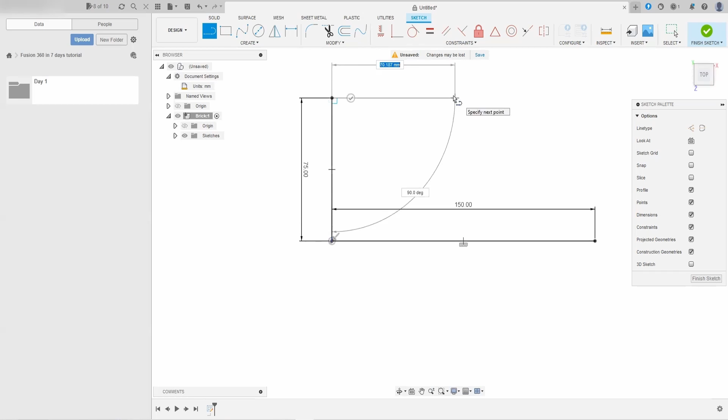This is day 4 of learning Fusion 360 in 7 days. This tutorial series is for complete beginners with Fusion 360 in order to learn the ropes from sketching our first component to assembling geometries by day 7.

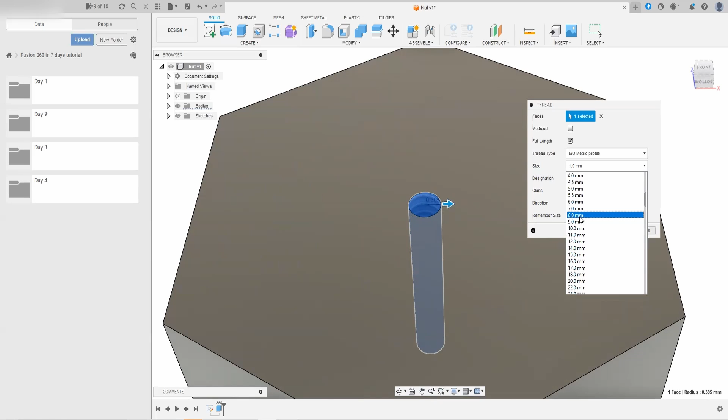Today, we will be taking a look at how we can use the thread command in order to model standard sizes of bolts and nuts, as well as seeing how construction planes may be helpful in order to mirror certain desired features we create along the way.

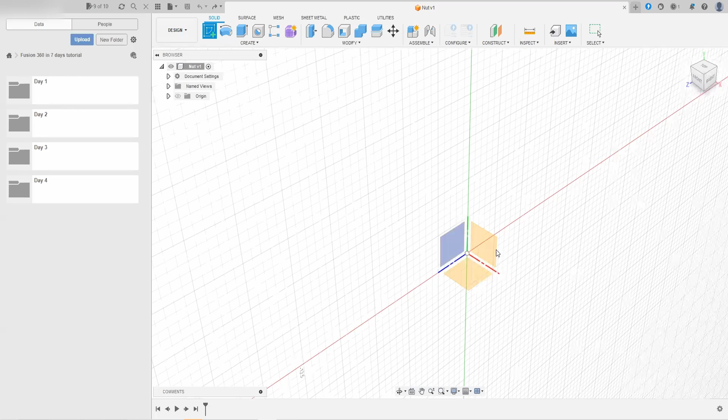Let's get into it. In order to start sketching our nut, we need to first sketch the nut's hexagonal shape. Luckily for us, there is a polygon sketching aid built into Fusion. But first, let's enter sketching mode. Now we can go to the Create drop-down section and find the Polygon section.

A circumscribed polygon is where a circle can be drawn inside a polygon so that all of its faces or edges are tangent with the circle. And an inscribed polygon is where we can draw a circle that passes through all of the vertices of a polygon. Or edge polygon, which simply means dimensioning one edge of the polygon, and the program will sketch the rest around it.

For this example, I'm going to go ahead and choose the circumscribed polygon, and as we can see, this window will appear here. And like the circle command, we will put the origin of the polygon at the global center of our environment and drag outwards. As we can see, two dimensioning boxes appear. One for the number of edges we want our polygon to have, and the other for the radius of the circumscribed circle in the polygon.

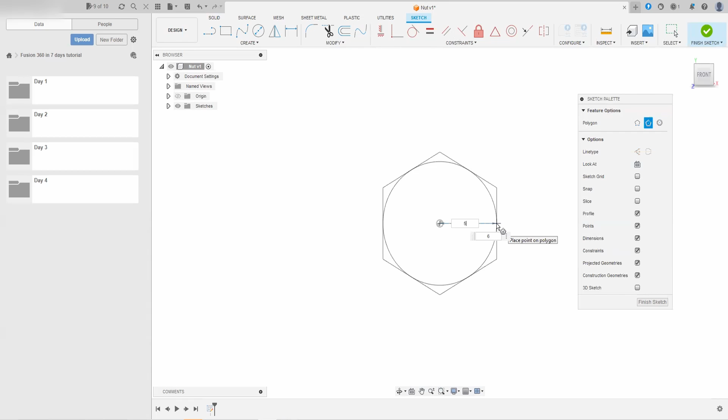Since we are modeling a nut, I will choose the number of faces as 6 to have a hexagon, and for the radius of the circumscribed circle, I will put 5.5 millimeters. Click again, and there you have it. That's how easy it is to sketch a polygon.

Next, we'll draw a circle inside the hexagon, which when we extrude will represent the hole that is present. So grab the circle command and snap it to the middle of the environment and drag outwards. And I will dimension the circle to have a diameter of 8 millimeters. Click on OK, and there is our circle.

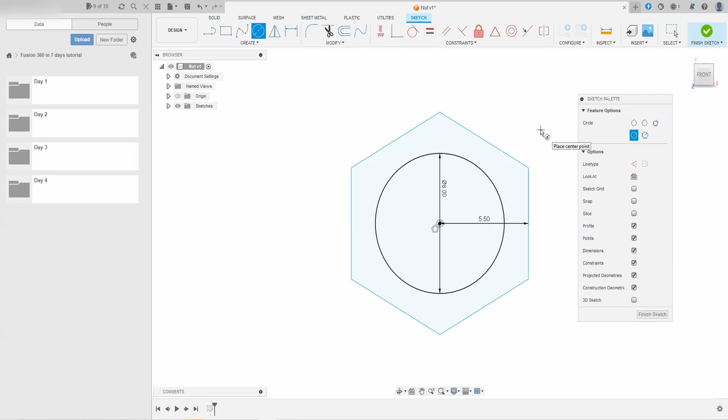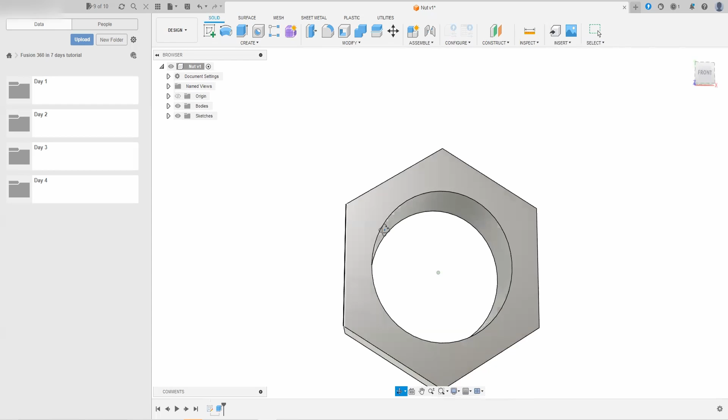Now we can use the extrude command to only extrude the area between the circle and the hexagon. So exit sketch mode and grab the extrude command and select the outer area. And let's extrude this by 5 millimeters. Press on OK. And there you have it. We have the basic shape of our nut.

As you may have noticed, I took a bit of a shortcut, having sketched the area where our hole was going to be before I extruded the shape. You could have also just extruded the regular hexagonal shape and then gone back and in a separate sketch drawn the circle and cut it from the center to the bottom. Either way, this would have worked.

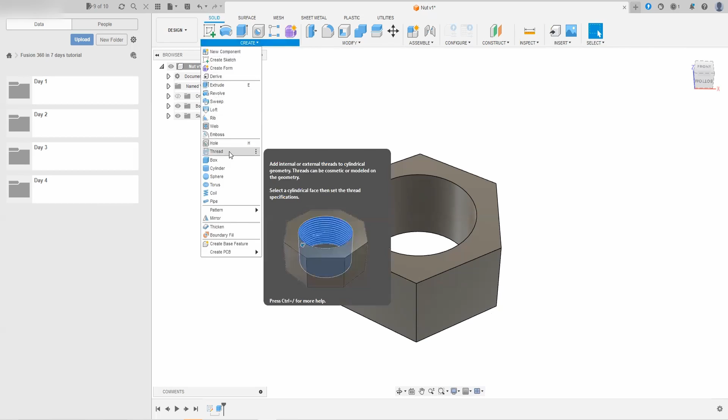Now let's add the threads to our hole. To do this, we can find the thread command, which is in the Create drop-down menu, and that will open up this window here. First, we need to specify which face we want our threads to be on. In this case, it will be the inner face of our hole.

The modeled checkbox just underneath gives us the option whether we want the thread to be physically modeled or just give a visual representation of what the threads are going to look like. This checkbox below, the one named full length, gives us the option on whether we want to extend the threads across the entire length of the selected face, or if we unselect the box, we can choose to specify the length over which we want the hole to be threaded.

For thread type, this allows us to choose the thread standard we want. We will leave it as ISO Metric profile for this example.

Size allows us to specify the diameter of the thread. Please note that the diameter of the thread does not need to match the diameter of the hole that we've created. The hole that we created was just simply a placeholder to specify that we want threads in this area. So if we wanted, we could choose a thread diameter of size 1 millimeter, for example, and this would actually fill in the hole that we initially created. But for now, let's leave it to a diameter of 8 millimeters.

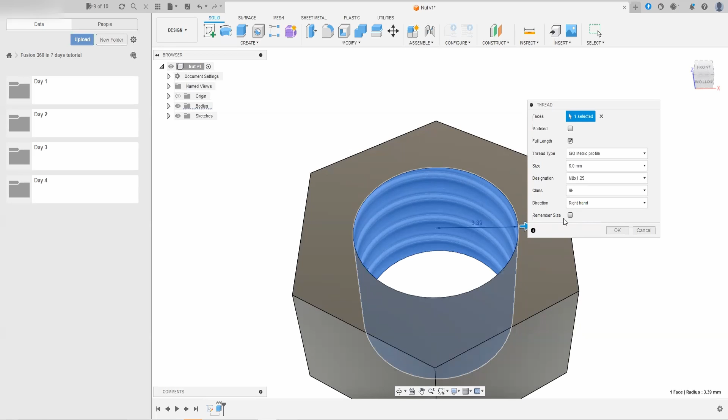Now that we've gone through all the options and that we have chosen the threads that we want for our hole, we can go ahead and press on OK. And there you have it. Now the hole that was going through our solid is now completely threaded. Very cool.

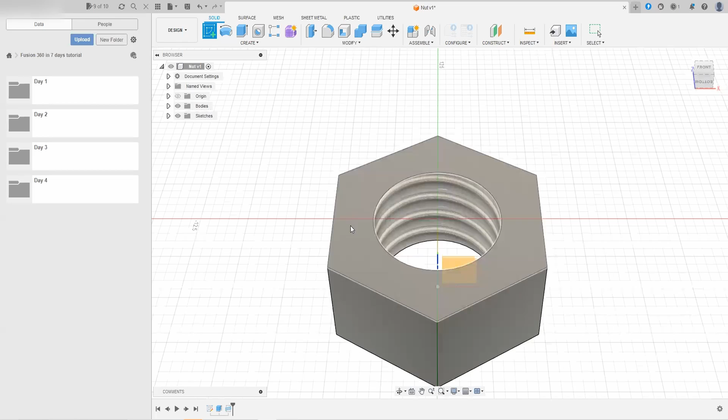With the threads added to the hole, we can go ahead and add those chamfers around the edges to clean up the nut and make it look a little more realistic. To do this, let's enter sketch mode again, press on the sketching icon, and then press on the top surface.

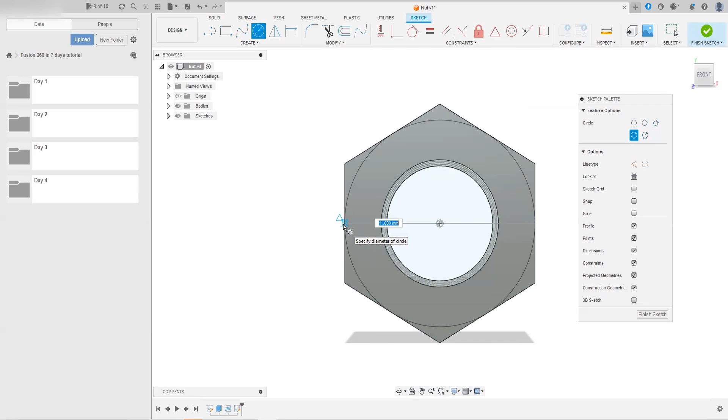Next, we will sketch an inscribed circle in the middle of our polygon. So let's grab the circle command and connect its center to the global center of the environment. And then drag out to the closest edge until we see the little blue triangle and blue circle appear. The blue triangle means that we are at the midpoint between two vertices on the edge, whereas the blue circle means that the edge we are connecting it to is tangential to the circle. By clicking again to confirm the circle, we can see that the circle turns black, which means that the sketch is fully defined, so that is good.

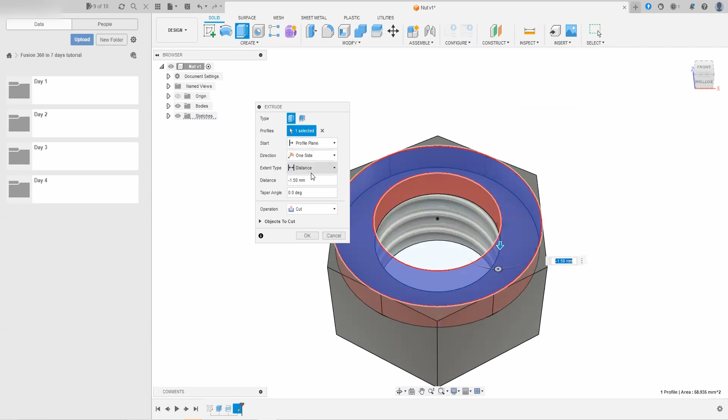Now we will exit sketching mode by pressing on the green check mark and grab the extrude command from the create section of the toolbar. For this extrude, we will choose the circle that we have just created. Let's drag the extrude arrow slightly downwards to start the command, but then let's change the extent type to through all to go through the solid that we currently have. The taper angle in this case, we are going to put 45 degrees, or you can also just change this to any angle that you want your chamfers to be.

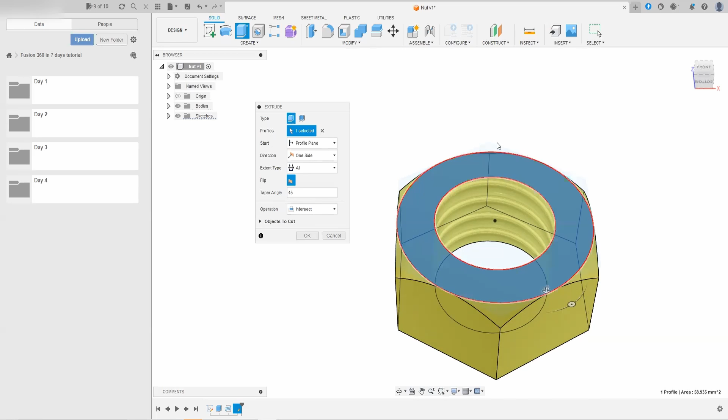And finally, for the operation, let's press on the drop-down menu and choose the intersect command. This command will allow us to keep the intersection between the current solid and the solid body we are extruding from this command, and will allow us to also get rid of the corners of the hexagon, since these will not be within our intersecting zone. Press on OK, and there you have it. We have now added chamfers to the vertices of our nut.

Now we could repeat all of these steps in order to do the exact same thing on the bottom face, but this would be the perfect time to introduce the mirror command in order to save a little bit of time. The mirror command is extremely useful since it allows for bodies, sketches, or even features to be mirrored or duplicated across a plane or axis. This is especially useful if the feature took many steps or used difficult geometry, allowing the user to recreate it with ease.

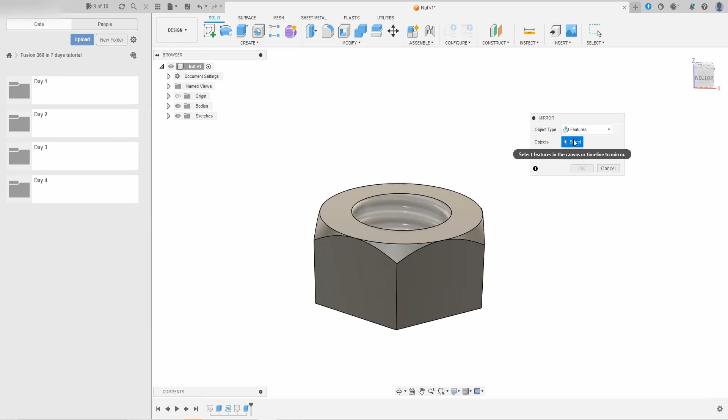So to start, let's go to the Create section of the toolbar, press on the drop-down menu, and grab the mirror command. This window will appear here. Object types specifies the kind of thing we want to mirror, which can either be a body, face, feature or component. Since the thing we want to mirror in this case was an action of extruding, we will choose the object type as feature. For the object, we need to select what we want to mirror. In this case, I will go down into the timeline and choose the latest extrude that we did by pressing on the last extrude symbol.

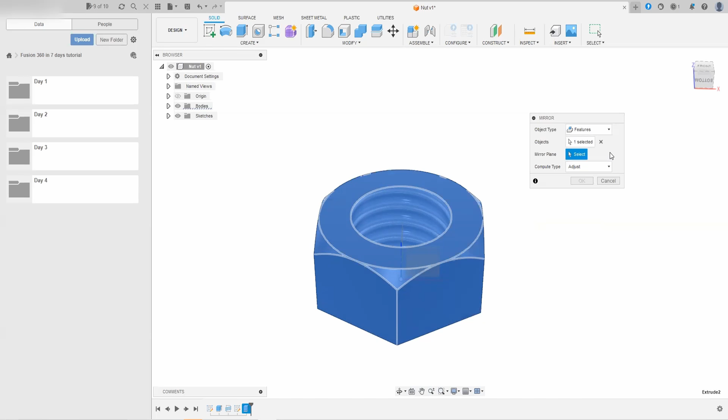Mirror plane is the plane over which we want to mirror this feature. Now, since I created the feature on the top face, I want to duplicate this on the bottom face. So we would need some sort of plane at the midpoint between these two surfaces, which we don't currently have. So let's close the mirror function for now to add a construction plane that will act as our mirroring plane.

To do this, go to the construction section of the toolbar and press on the drop-down menu. Here we have a whole bunch of reference planes and axes that we can create in order to aid construction of our model. I would encourage you to explore the different options that we have here, but for now, let's go ahead and grab the midplane command.

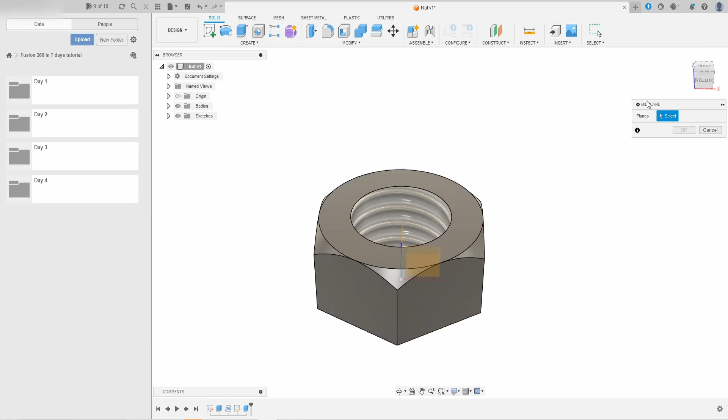We will then select the top and bottom face of our nut, and then the program will add a plane at the midpoint between the two selected surfaces. Press on OK, and now we can go back to the mirror command to duplicate the feature we used to create these chamfers.

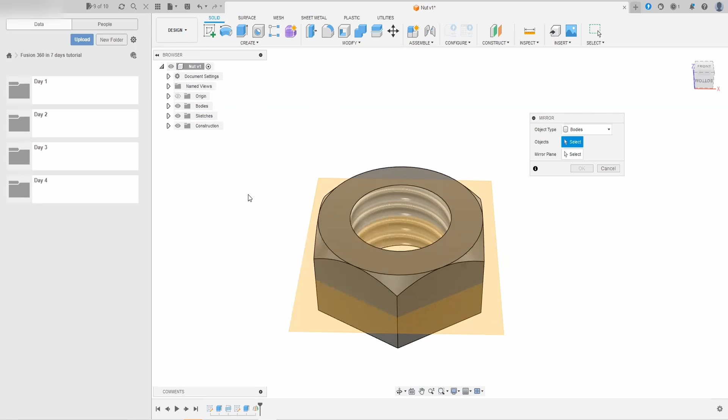Press on the Create drop-down menu and go to Mirror. For the object type, this will be a feature as we previously discussed, and we are going to choose the object as the extrude from the timeline at the bottom. And then for plane, we will choose the midplane that we just created. And as we can see now, the program is previewing the mirror it will perform.

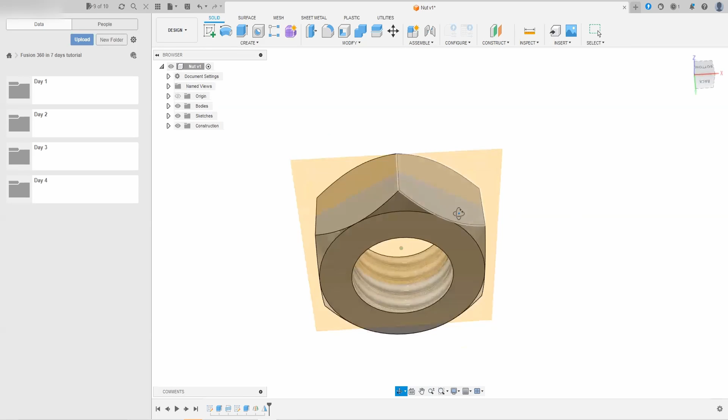Press on OK to confirm the command. And there you have it. The chamfers we created on the top surface have now been duplicated to the bottom surface. Very cool.

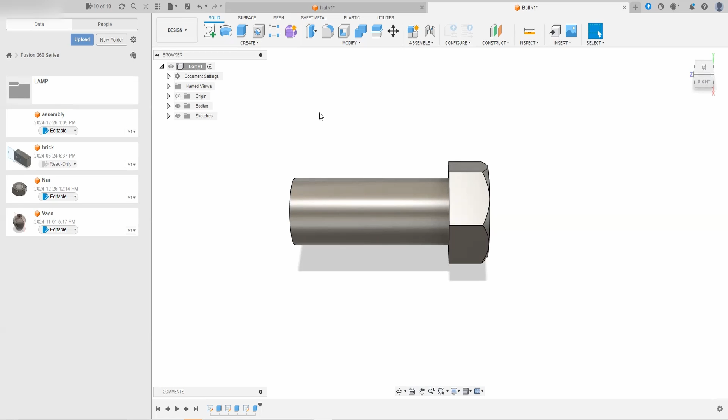Now with the nut created, let's go ahead and switch gears a little bit to the bolt to see how the thread command works for creating bolts. And it's very, very similar to the nut, but instead of having a hole, we're going to have a face of a cylindrical body where we want to apply our threads.

So let's grab the thread command. The face we will choose is this cylindrical face. And for fun, let's deselect the full length box. That will make a couple more fields appear. Offset, this refers to how far from the end we want our threads to start. So if I put 5 millimeters, we can see that there is a flat section and then our threads and then another flat section since our threads don't extend to the end.

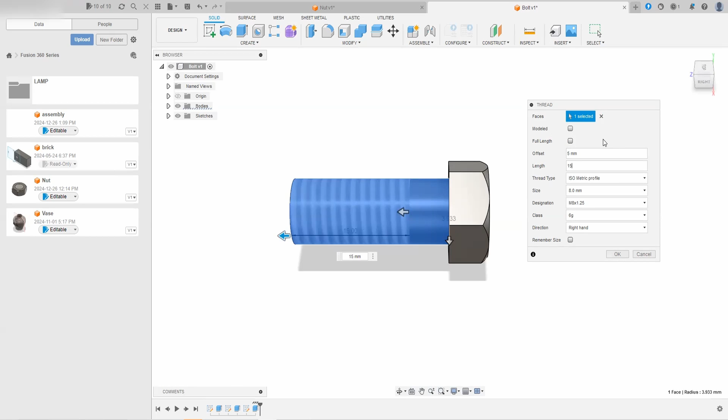Length refers to how far we want our threads to extend from the starting surface. In this case, I will put 15 millimeters to show that we can easily make partially threaded bolts. And to demonstrate what the modeled threads look like instead of the imaged threads we saw earlier, let's check off this box that says modeled threads and then press on OK.

And by comparing this to the nut that we had before, we can see that the command physically cut out the threads out of our object rather than just creating an image on the surface of what the threads are going to look like as we saw with the nut. And that's how easy it is to create partially threaded bolts and nuts using the thread command in Fusion 360.

So that is going to be a wrap for day 4. A slightly shorter video, but today we explored the power of the thread command in order to make some hardware. In the process of doing this, we also learned different tools such as the Polygon sketch command, midplane construction planes, and the mirror command, diversifying our arsenal to understand what is achievable in Fusion 360.

Unfortunately, this will be the last day of single body modeling, but look out for day 5 where we'll dive deeper into the world of multi-body assemblies and connections, elevating our CAD skills even farther.